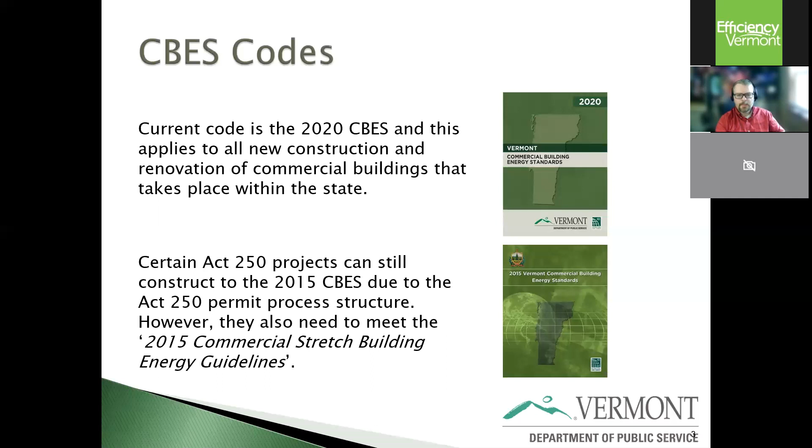So what does CBES apply to? Well, it's easier to say what it does not apply to. So basically, if it's a residential building and it's covered by the residential building energy standard, obviously it wouldn't apply. Low energy buildings—oh, I just realized I messed up the slide there. Never mind, I'll fix that for the slide deck you'll have access to. Low energy buildings, basically, if the building uses lower than 3.4 BTU an hour per square foot, which is really low.

That's kind of like passive house standard almost, which would be difficult to necessarily do currently with residential buildings. Unconditioned buildings, which basically means you're not heating or cooling the space—greenhouses, for example—seems kind of obvious.

Although the 2021 IECC, which these codes are based off, will start to regulate those. But since Vermont law specifically exempts agricultural buildings for the most part from having to meet the energy codes, that would not be included.

Inflatable buildings—I've seen a few of these, generally used for over winter—but I've never seen an inflatable office, though maybe it exists.

Yurts. It seems a bit of an odd exemption, but believe it or not, people are using these for commercial space, and as a tent, it's really hard to make it meet the commercial energy code, which is why we created an exemption. But it has specific requirements.

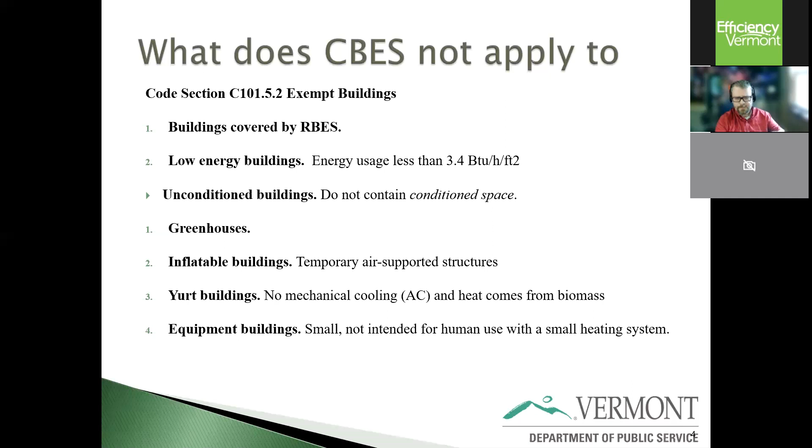Now, how does CBES and the state energy goals interact? It's kind of a yin and yang approach, I guess—they both inform each other. A great example of this is electrification.

Prior to the 2020 code, there were very strict guidelines on what you could do in terms of using electric resistance to heat a space. It was basically prohibited except under great conditions of hardship, or if it's just hard to heat any other way. The 2020 code as it currently stands includes specific exemptions around using electric resistance heat.

For example, multifamily buildings can be exempt if their heat load is less than 6 BTU per square foot per hour—or per year, something along those lines, forget the exact number. Or if you're using heat pumps that would need electric resistance backup heat, as long as your envelope is better than, I believe, 2.5 air changes an hour.

Well, the standard was 3 air changes an hour at 75 pascals, which probably doesn't mean much to you people, sorry.

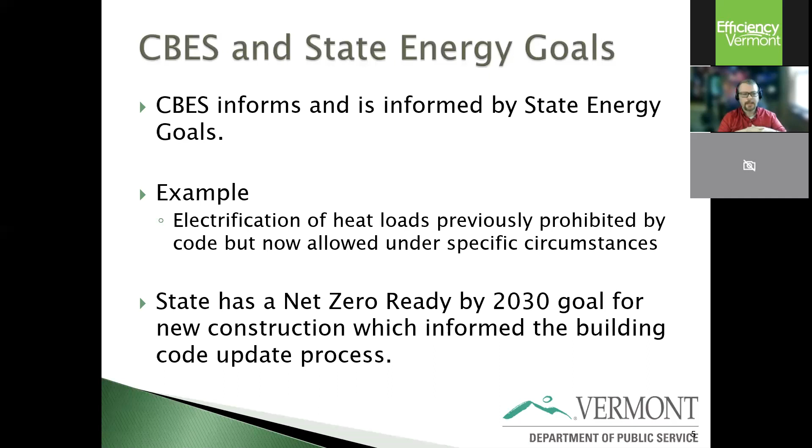So basically, the code gets updated every time the IECC, which the code is based upon, gets updated. The IECC is typically on a 3-year cycle, but this past year it's been delayed a little bit, so it's only just been published as of January 2021, which means we will be looking at starting the update process again at the end of this year.

But the earliest that update would come into effect would be January 1st, 2023 at this point. It may actually be later, and we'll get to why that is in the next slide.

So basically, the current code came into effect in 2020, on September 1st. And it took over a year of stakeholder meetings and then public hearings, etc., going through the rules process in order to get the code adopted. And then there's a minimum of 3 months after the code is adopted for it to become effective.

We actually delayed that from 3 months to 9 months to make sure that we had all the supporting materials and computer software, etc., prepared, so that when the code took effect—

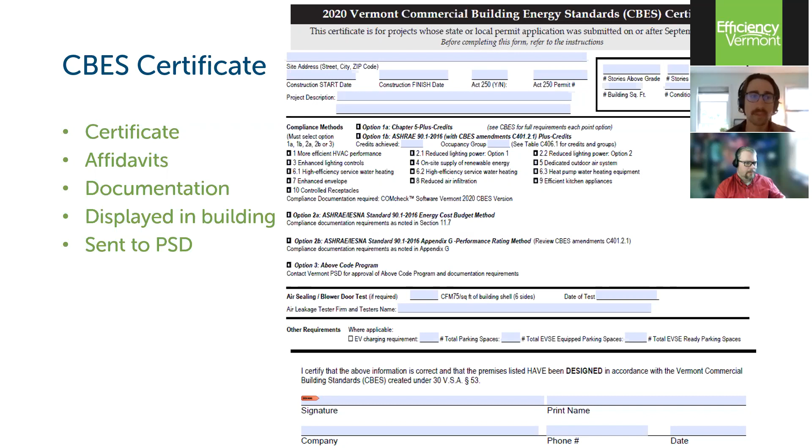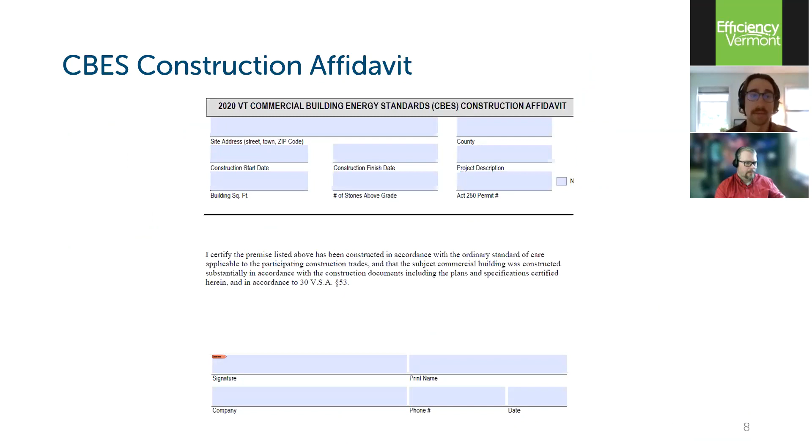And again, there's the two affidavits that need to be signed. There's the construction affidavit saying that it has been built to the code standards, and then right after that is the design affidavit saying that it has been designed by or designed to meet the commercial energy standard levels.

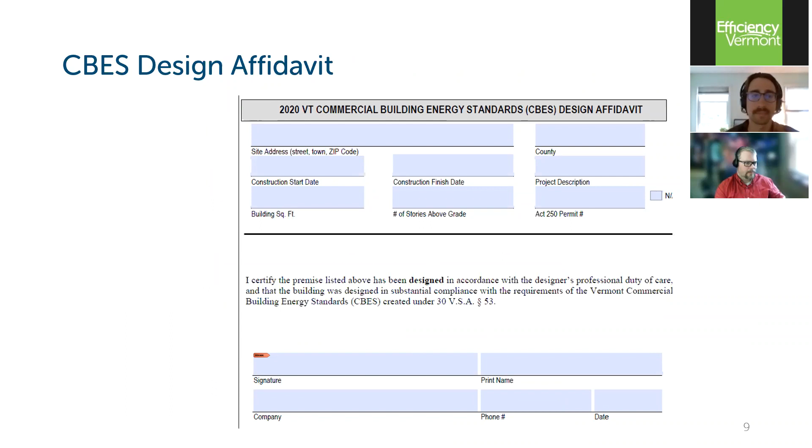Also on the Public Service Department link, whomever is filling out that certificate - it could be the owner or the designer - they also need to fill out some compliance documents that go with that certificate, using the COMcheck software that comes from the U.S. Department of Energy. There's a specific Vermont 2020 energy code selection in there that I'll show. Basically you input what your envelope, mechanical, and electrical levels are for the building and the equipment you use, and reports are generated stating whether you meet or exceed the energy code. That's a little more detailed compliance paperwork to send to Barry as well.

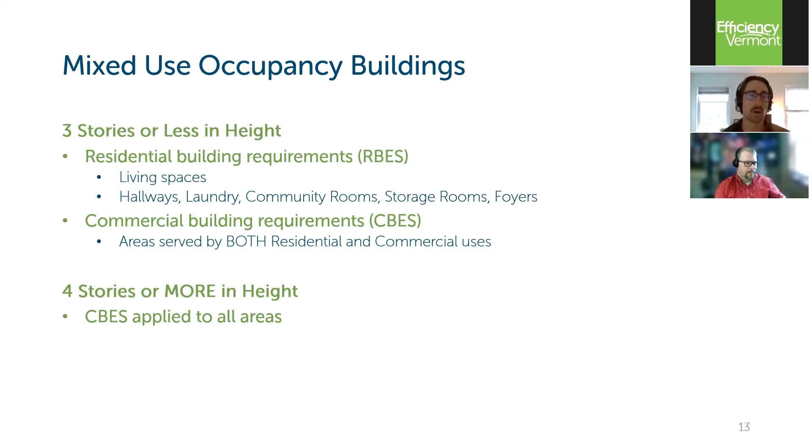So any residential-only spaces - living spaces, dwelling units, hallways, laundry rooms, and storage just for the residents - would need to follow the residential code. Areas that are commercial only, or serving both commercial and residential uses, would need to follow the commercial energy code. If you have a building that is 4 stories or more in height, then even if it has some residential uses, the commercial energy code will apply for all areas of that building.

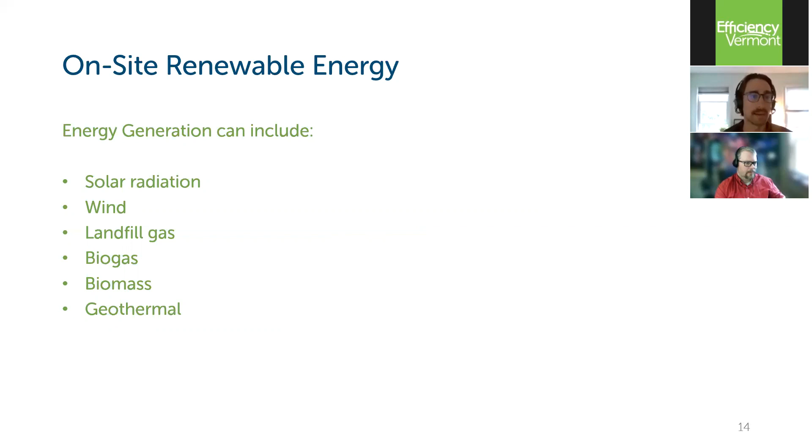There's a definition for what on-site renewable energy can include. We've got solar, wind, landfill gas, biogas, biomass - that's burning wood - and geothermal energy. There was tidal on here, but I took that off because I don't believe that makes much sense in Vermont.

And a new definition for this code is a semi-conditioned space. This is a space that is heated or cooled to a much lower threshold than a standard building would be for human comfort, and there are numbers here for what you would need to reach - it must be below these in order to be considered a semi-conditioned space. Really it's only, say, warehouses and some big storage rooms that might be heated to 50, 55 degrees and maybe have no cooling or just extremely limited cooling that would fall into this. So it's not very common.

But what it does is, if you have a semi-conditioned space, basically all the envelope requirements - the R values - are about half as much as what the standard insulation levels are.

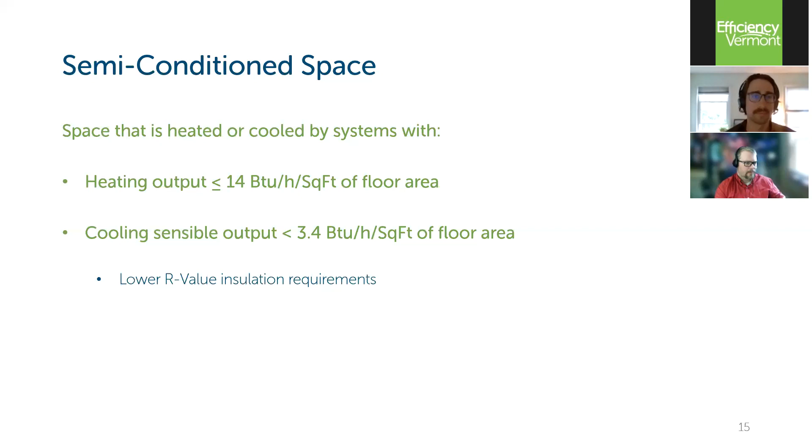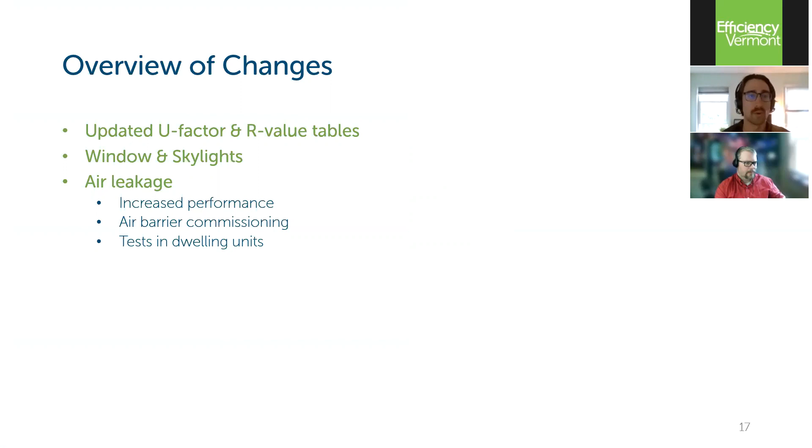Okay, so I'm going to move on to what those envelope requirements are for the new code. And these are the major changes. So some of the R values have been updated. Windows and skylights have been improved a bit, and there are now new air leakage requirements for all commercial buildings and also for dwelling units within commercial buildings.

So for the roof insulation, these are the new R values; if you do at least this, if not more, then you will meet the energy code. I believe the attic insulation is about the same as what it was in the previous code, but the insulation above deck, so if you've got a metal building or a building with all continuous insulation up on a flat roof, that has increased. And then metal buildings, you've got different layers of insulation going parallel to and perpendicular to the roof framing members. That's what all these different numbers here mean.

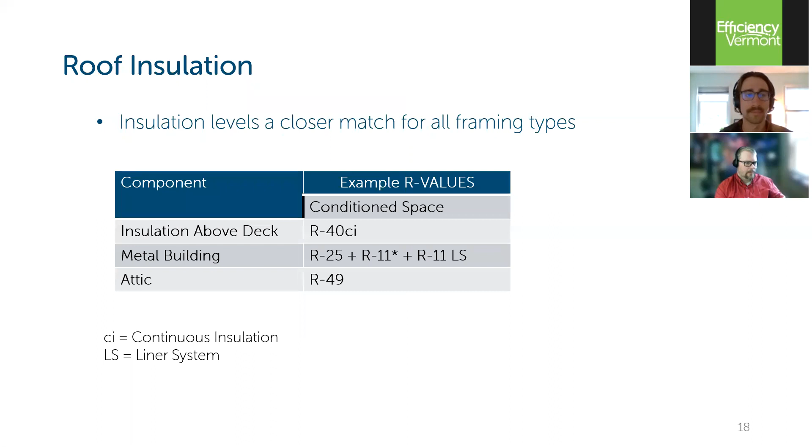But basically, they're all a much closer match, no matter what the building type is, whether it's attic insulation, metal building, or all above deck. It's a much closer match in this code. Any above grade walls, similarly, the insulation values are now a closer match. So depending on if you've got a concrete or a brick wall, metal building, a metal framed building, or a wood framed building, you've got some slightly different requirements for each of those.

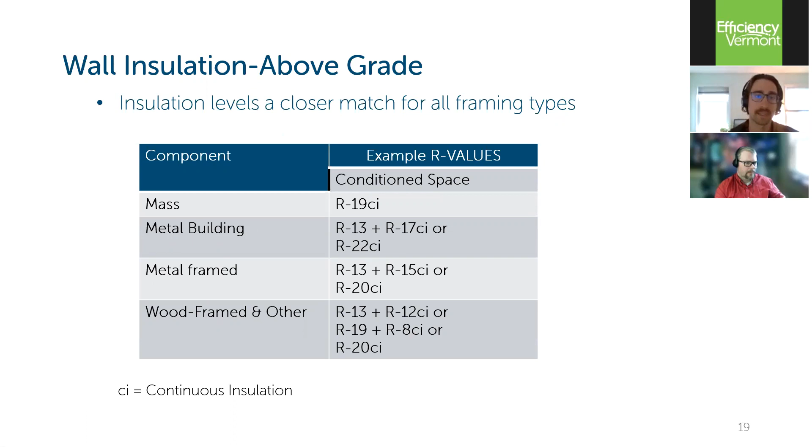And all of these now require CI, which is continuous insulation. So that's typically rigid foam or rock wool or some other insulation that is continuous, typically on the exterior, sometimes on the interior of the wall, that is uninterrupted by framing. So, as it says, it's continuous. So now all types of walls require some amount of continuous insulation in order to meet the code. Below grade walls, you need to meet R15 continuous insulation. That can be, again, either on the inside or outside of that wall.

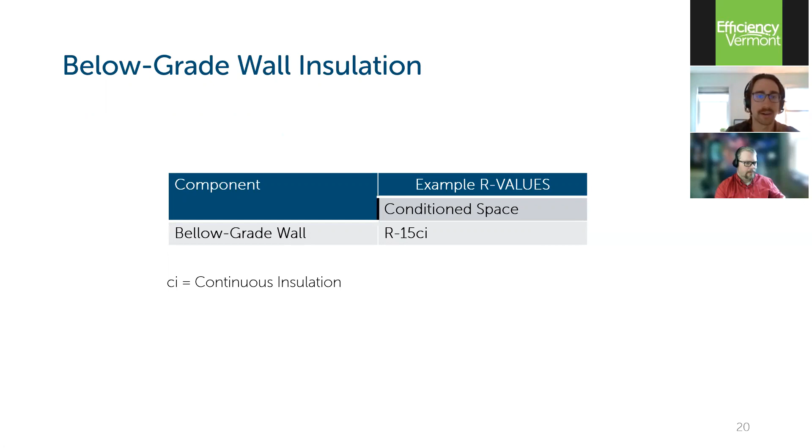And for floor or slab insulation, we've got a few different options here. What I want to call out as the biggest change are the last two. So for unheated slabs and heated slabs, you need insulation under the entire slab. So an unheated slab is R10 under the entire slab, and a heated slab is R20 under the whole slab. Previously, it was just either around the perimeter of the slab and or down about 4 feet. So that's been changed to be under the whole slab now.

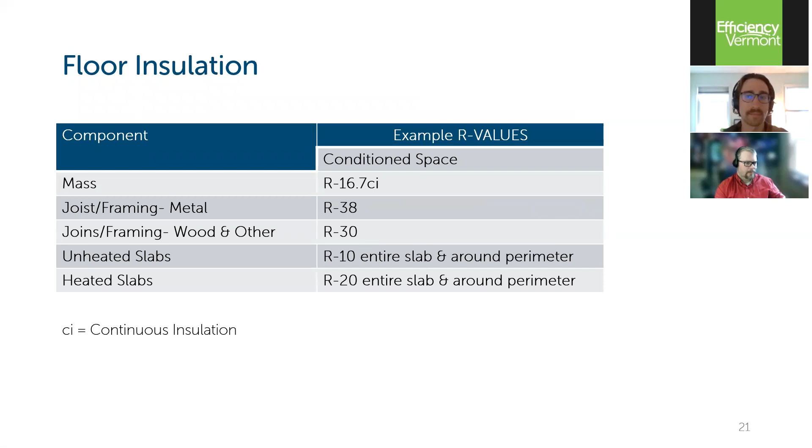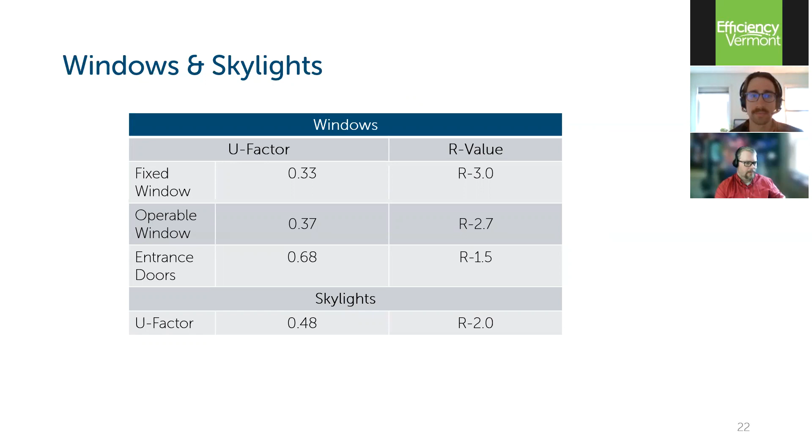So the other change that happened to the code that I think is pretty important is there are 2 different ways to comply for the air barrier of the building. You can either test the building with a blower door test and hit a specific number, and then you would pass that portion of the test. Or you could do air barrier commissioning, where you have someone come in and there would be at least 1 blower door test throughout it, a bunch of other items on a checklist, smoke testing certain portions of the building,

but you do not need to hit a specific number. The thought is if you do all these items, you are most likely to hit a good air barrier performance number. So I think most buildings are going to go with the first route, just the testing route, where you test it at the end, and if you hit the number, you're good. If not, then you need to go back and make some modifications.

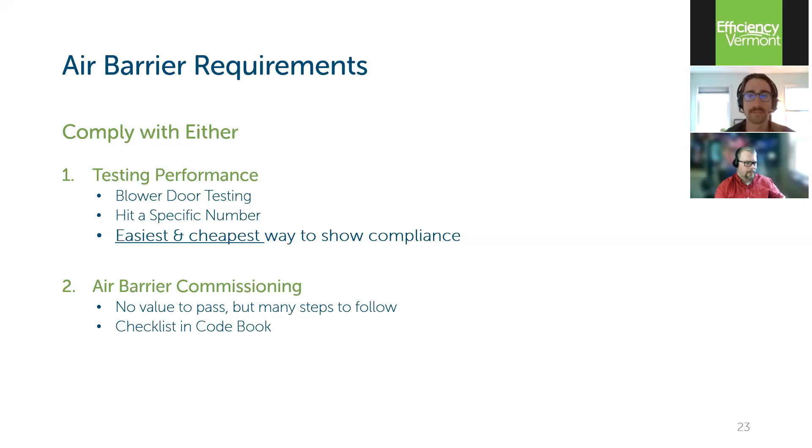So the new standards are 0.3 CFM per square foot, and that is measured. The 75 there means that it's tested at 75 pascals. You depressurize the building to that amount, and that's where you measure the air leakage. And the square footage number comes from a 6-sided envelope.

So in this version of the code, you'll add up everything, all the walls above and below grade, the slab or basement, and roof. The previous version of the code was we were only testing at 50 pascals and using a 5-sided surface area calculation. So it's not really comparing apples to apples, this version of the code to the last. We've got some numbers, if you want to compare those, we can help out with that.

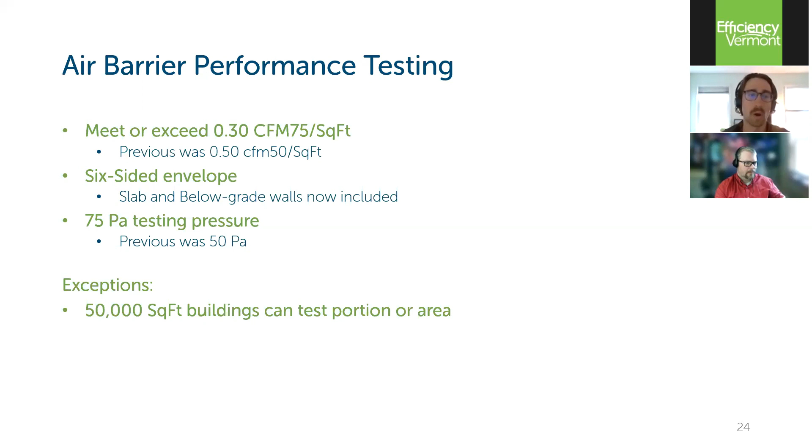But this is how the commercial industry around the world does it; it's more typical to do the 6-sided and 75 pascals. So I think that was a good change. And if you've got a large building over 50,000 square feet, there's some rules in there about just portions of the building you can test. You don't actually need to do all of the square footage of that building with the blower door test.

And the dwelling unit air infiltration. So if you've got a commercial building with multiple dwelling units in it, you actually need to put a blower door on some of these individual dwelling units and see how airtight they are compared to their neighboring dwelling units. So those must hit 0.35 CFM, again tested at 75 pascals, counting all 6 sides of that dwelling unit.

You've got to test about 10% of the dwelling units in each building. It's got to be random. The construction contractor won't choose them. And these must be retested if there's a failure until they pass. So this is a bit more strict, where you must hit that number and go in and do whatever's necessary to do that.

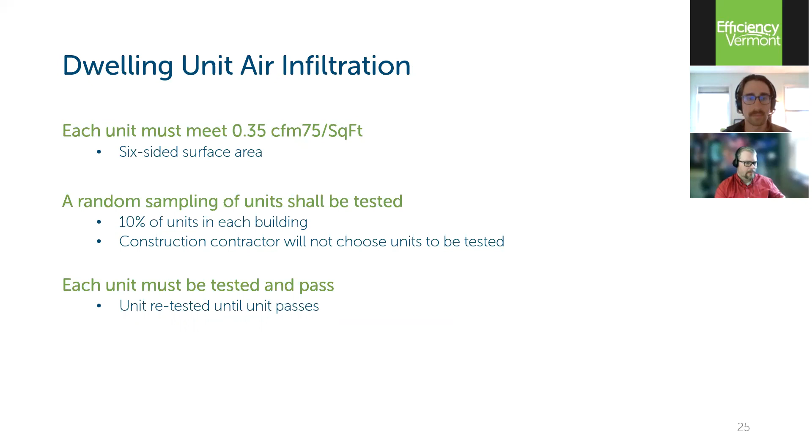All right, on to mechanical systems. Bryn, chime in if there's any questions, but I'm going to assume not and just keep rolling.

So the Commercial Energy Code references one other code, which is ASHRAE Standard 62.1, which is ventilation for basically indoor air quality. And what that states is that buildings cannot use just natural ventilation any longer. It can be a part of the ventilation strategy, but you basically need some sort of mechanical ventilation system to both exhaust and supply air to a commercial building. So that's, I think, pretty good to call out. Just baseboard heat and windows won't cut it anymore.

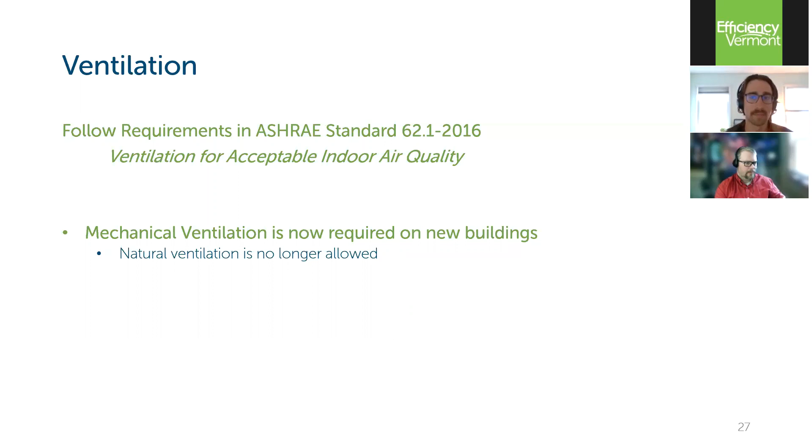Barry mentioned a bit about this, the electric resistance. So overall, electric resistance heating is still prohibited in this version of the Commercial Energy Code, as it has been for the past couple iterations. But there are two new exceptions that I want to discuss.

So one of them is if you have a multifamily building that has really low heat load requirements, and those are 6 BTU per hour per square foot at the design, at the coldest temperature that that building should see. So if a multifamily building meets that requirement, you could use electric resistance only to heat that building. It's just such a low load that it's not a huge demand to use the electric resistance. It can do a lot of work there.

And the other exception is for all other commercial buildings, you can use cold climate heat pumps with electric resistance backup. So the cold climate heat pump must be able to meet all of the heating load down to 5 degrees Fahrenheit outdoor air temperature, and then below 5 degrees, you can have the electric resistance heating turn on, and those need to be two different control systems to make sure that the electric resistance heat will not be on above 5 degree outdoor air temperature.

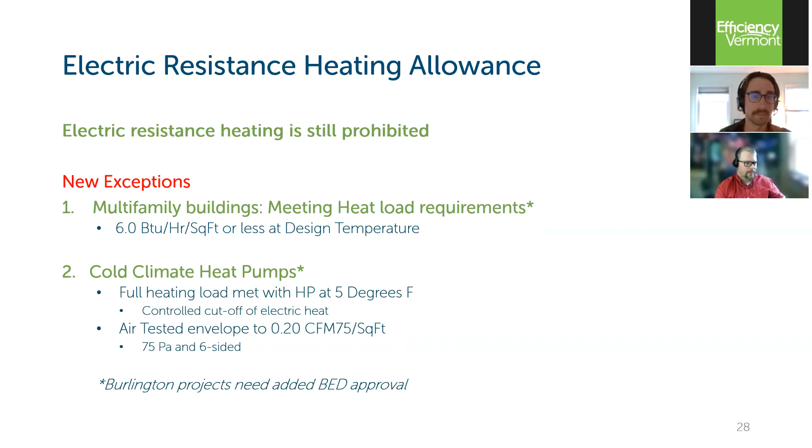There's a bunch more in the mechanical section, but I'm just going to share this one other slide. Basically, there's tables in there for what the minimum efficiencies are for multiple types of equipment: air conditioning units, heat pumps, chillers, VRF, heat pump systems, furnaces and boilers, and some others.

So basically in the code, there's the minimum efficiencies. Here's some boilers showing between 82 to 84% efficiency. The code says that is the lowest that you can install. And then there's options that are more efficient than that on both the heating and cooling equipment.

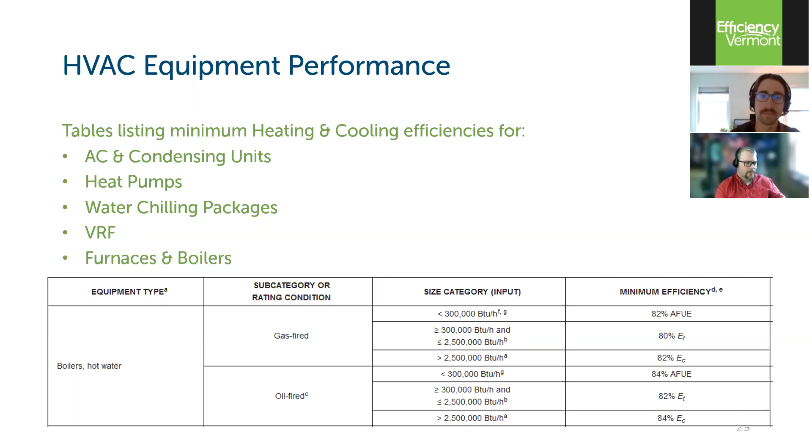So now I'll just mention, so this is service hot water, domestic hot water in a commercial building. Just got one slide on this. So the changes that happened here are the maximum size of individual electric water heaters increased from 5 kW up to 7.5 kW. And if you have a heat pump water heater that also has electric heating element within that, there's no limit to how large that electric resistance heating element can be.

If you meet these items: 60% of the hot water comes from just the heat pump and not the electric resistance, if you've got low flow shower heads, and any dishwashing equipment is Energy Star rated so that it uses less water. So those are two new additions that I think we're going to see utilized more often in this version of the code.

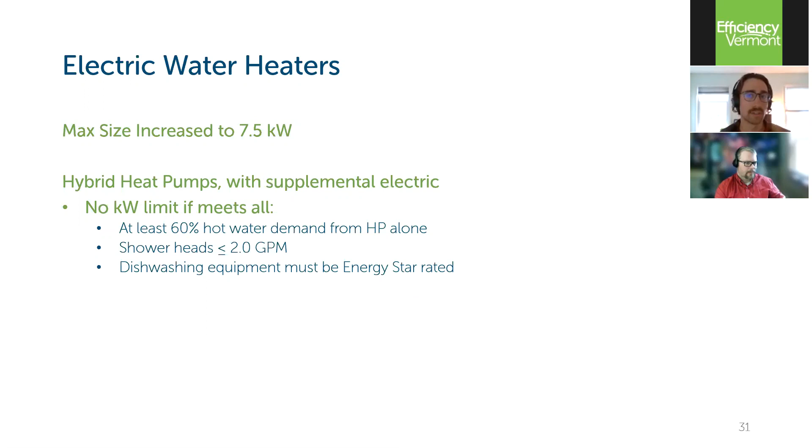Now I'm going to move on to lighting systems. There's a lot in here as well, so I'm just kind of touching on a couple points. For the lighting systems in buildings, it basically starts out on the controls side. It states that occupancy controls are required in a good number of spaces. So if this was an office building, almost a majority of the spaces, I'm not going to read them here, but they're listed, would require occupancy controls that would turn the lights off after at least 20 minutes.

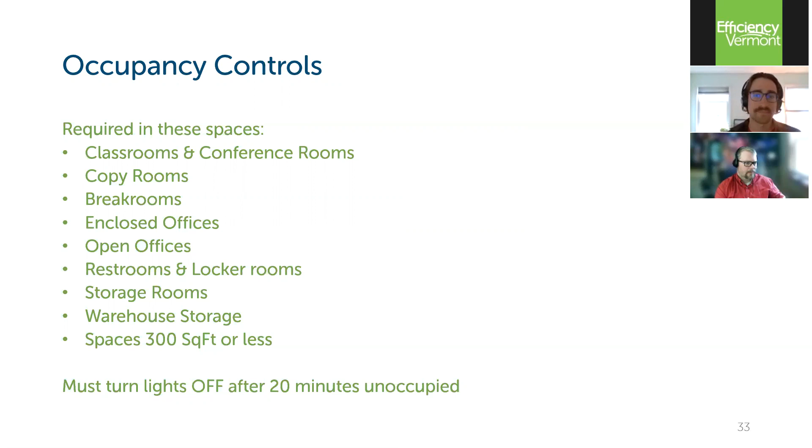And there are daylighting controls required in areas adjacent to windows and under skylights, if there's more than 150 watts of lighting fixtures that are within those daylighting zones. So that can be a good number of spaces as well. If you've got a restaurant or shopping area, the first floor of those don't need the lighting controls, and some other areas like healthcare facilities are exempt from that as well.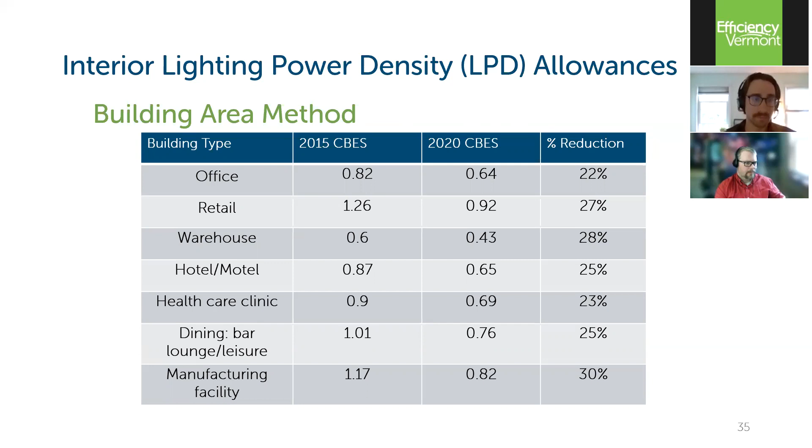And I just listed, there's more in the code, but I listed some of the most commonly seen building area types in Vermont. Basically what it comes down to is it was about a 25% reduction from the old code to the new code. That's still attainable. Efficiency Vermont is recommending even 20% better than the new 2020 levels. That's very possible with LED lights. So there is still room to exceed this. So this is looking at a full building based on the type.

There's another strategy. I won't go into too much detail, but you could look at every single space within a building and see if those all add up to meet the energy code values. So again, there's an even more extensive table that I took a snapshot of that has the watts per square foot for different spaces within a building: offices, warehouses, corridors, conference rooms, etc. Some of those went up, or some of those stayed the same. Some got more stringent. Again, overall, if you kind of average them together, the reduction was about 25% more stringent lighting for 2020.

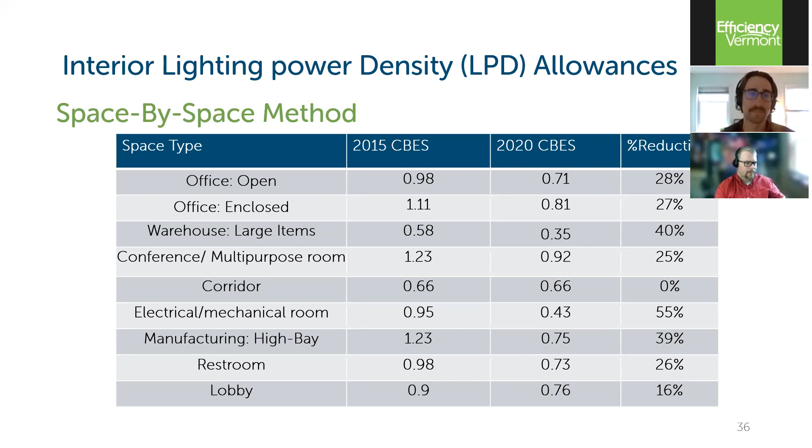So that's interior lighting. Moving on to exterior lighting. This one's done a little bit differently. What you start with is there's 3 different types of lighting zones that buildings can be located in within Vermont. I'll start with zone 3. Zone 3 are basically like Vermont's downtowns and city centers, where there's a lot of lighting already in place. Zone 2, I think, is the most common, where you've got both residential and some commercial areas happening next to each other. And Zone 1 is pretty rural, undeveloped areas within national parks. I think some ski areas, if they're not that developed, could be included in that.

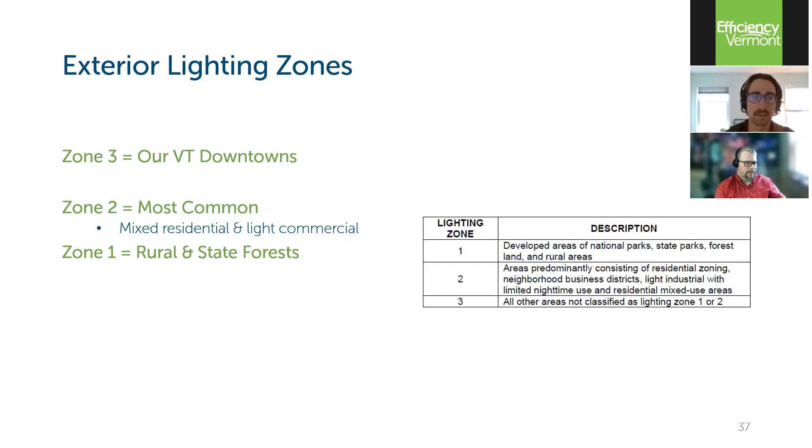So the reason we have those zones is similarly, there's an exterior lighting power density allowance based on what different things you have outside of your building that you're illuminating. And you've got the 3 different zones here. Basically, you've got parking lots. That's one that's pretty common for all buildings. You've got a very small watts per square foot allowance for those.

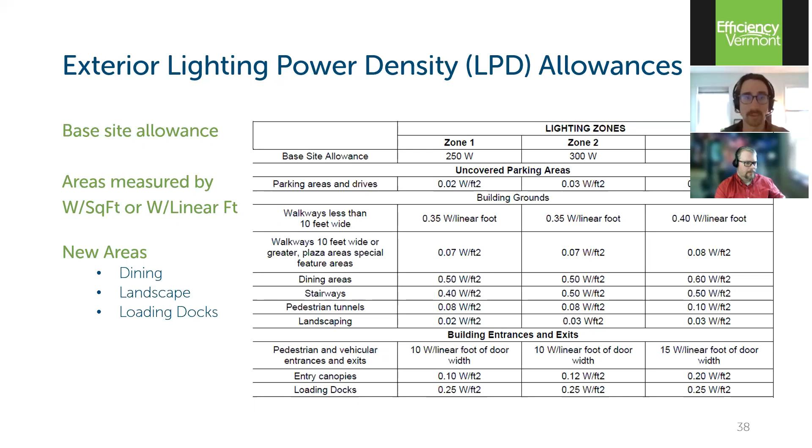Walkways, dining areas, stairways, landscaping, loading docks, etc. There's more to this table. So things are measured either by watts per square foot or watts per linear foot for walkways. And these have been reduced about 50% from the previous code, but using LEDs, Efficiency Vermont is recommending between a 20 to 30% improvement over these levels, which is still attainable.

And the last part I'll talk about for electrical is electric vehicle charging stations. This was a new addition to the code.

Basically, what the code says is, I'm going to show a table on the next slide where you calculate the number that you need based on the parking spaces you have in your commercial building. The code states that whatever that number is, you need to install 50% of the electric vehicle charging stations and then pre-wire the remaining 50%, so that down the road you could install the charging equipment, but you don't have to install all of them when the building is first built.

Those parking spots with the chargers need to be labeled for EV use only, to distinguish them from the other spots so that gasoline cars don't park in them.

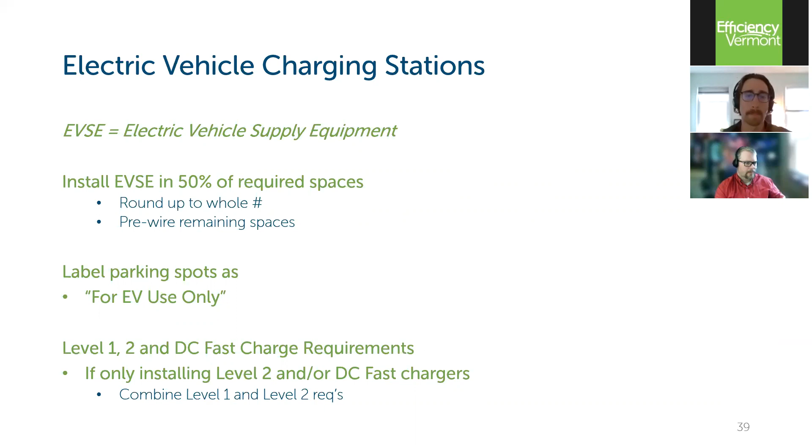You've got level one and two, and fast charge requirements that are split up in the numbers, and you would combine the level one and level twos together if you were only going to do level two or fast chargers on site. So this is the table from the code.

Basically, depending on the type of building that you have, which is on the left here, and the size of the parking lot, it determines how many charging stations you need.

Groups A and M - M is merchandise, that's like a sales type of building. B is businesses, education, so schools. I is institutional type buildings, and then R1 and 2. R1 is hotels and motels, and R2 is apartments and dorms.

So just going through an example here, I think is helpful. Say you've got a hotel being built, that's group R1, and it's got 100 parking spaces. When you look at the table, for over 25 parking spaces, there's an option A and an option B.

If we look at option A, it says that you need 0% of the spaces to be level 1. So that's easy. And 2% of the spaces should be level 2 or DC fast charge. So 2% of 100 is 2 parking spots. Again, the code says that you need to install 50% of those and pre-wire the other 50%. So with option A, you need to install one charging station and pre-wire one other.

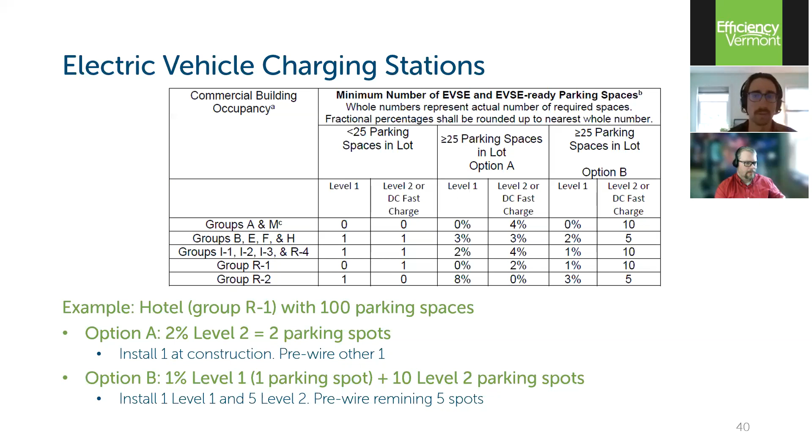All right, so moving on here. After the whole code, you follow everything in there, there's this section C406 that's called additional efficiency packages, and there are 10 different options. You need to get 6 credits from these 10 different options for a new building, and they all sort of vary based on the type of building that you have.

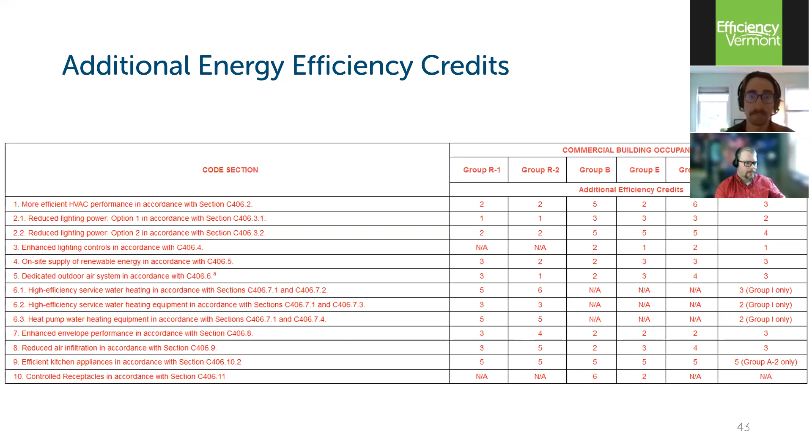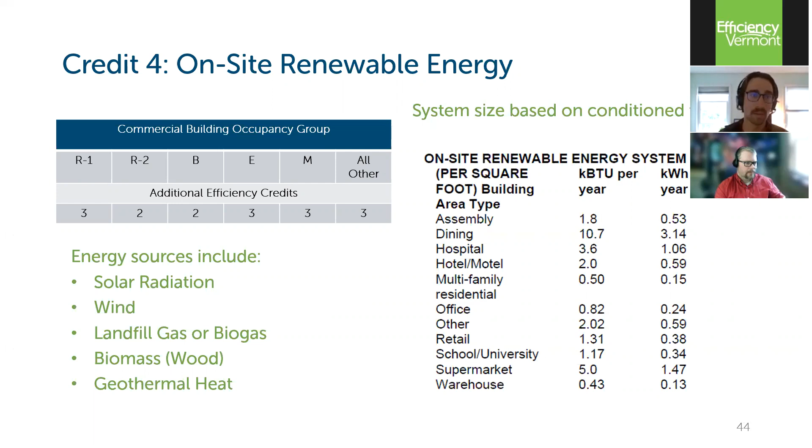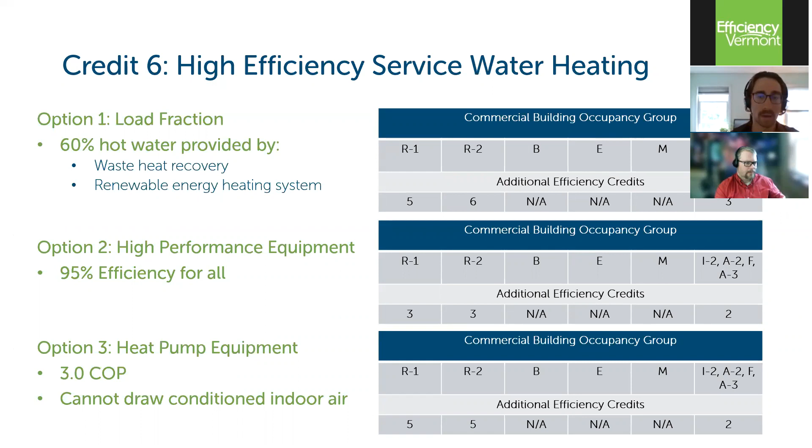Sarah asks, is a residential home that's converted to a town library considered commercial or residential under the energy code? If it's converted from a residential space, I'll go into more detail on that -- it's a residential space converted to a public space. So the change of occupancy is going from residential to commercial, so it would be a commercial space. It's an existing building, so I've got a couple slides on this coming up actually.

For existing buildings, certain aspects of the code you would need to meet, like the lighting requirements, you would need to make sure those meet the energy code. If the energy usage doesn't increase that much, you would not necessarily need to go in and re-insulate the whole building from residential levels to the new commercial levels. If it's a really old, uninsulated residential building, and you're changing the purpose of that building, then theoretically you would need to bring it up to the new energy code levels if it's going to use more energy than the residents did.

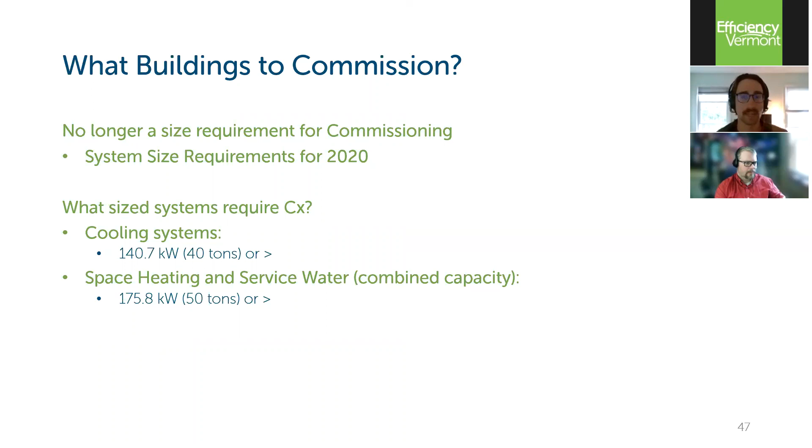Okay, so now moving on. So after all that, that's chapter 4 of the code. After that is chapter 5, which is for existing buildings.

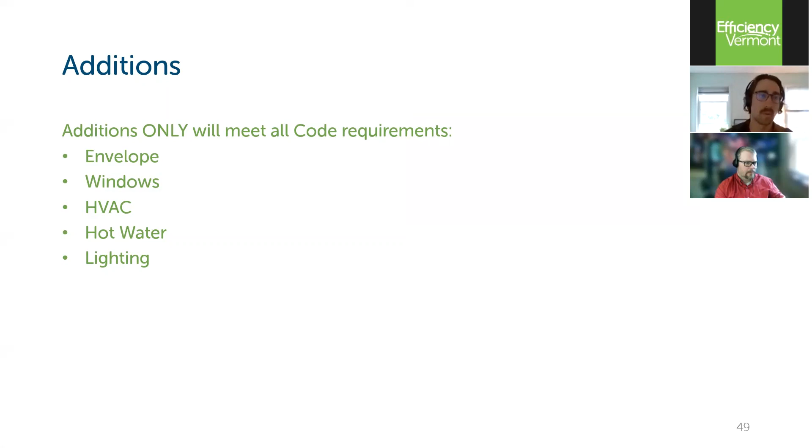If you have any addition that you're putting on an existing building, the addition needs to meet the energy code, including envelope requirements, windows, any new HVAC equipment you're putting in, hot water, and lighting systems.

Any alterations to an existing building - basically the code states that an existing building cannot be less conforming to the code than it was before the alteration. So basically what that means is items that need to meet the code are any new envelope assembly.

An alteration might include some new portions of a building, or new walls that go up, so those would need to meet the energy code. Any new boiler or other heating or cooling system replacement should meet the energy code. Same with your hot water systems and your lighting systems - if you're pulling out the lighting, then the new lighting should meet the energy code requirements.

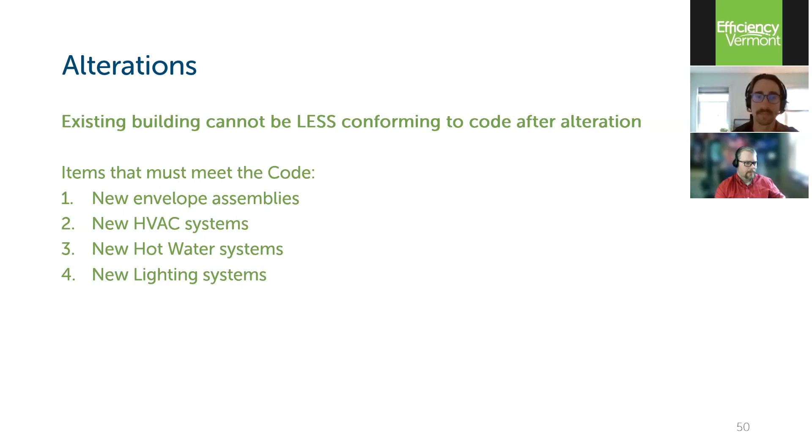It specifically states that these are alterations that you do not need to bring up to the energy code: installing storm windows, putting a window film on single pane glass, or exposing a wall cavity or floor/ceiling cavity that is already filled with insulation - that does not need to be brought up to the energy code levels.

It's not saying that you need to take a wall cavity and tear that off and bring that up to code if you weren't planning on removing or exposing that cavity in the first place during that alteration. So if it's there and it's not being touched, then you can leave it as is.

If you're replacing existing electric resistance, you can do like with like and still put those in - that's kind of one of the few areas you can use that.

A roof recover, which is just leaving the existing roof covering and installing something directly over top of that, does not require you to increase your insulation levels. And similarly, the air barrier does not need to be updated if you're doing a roof recover or replacement.

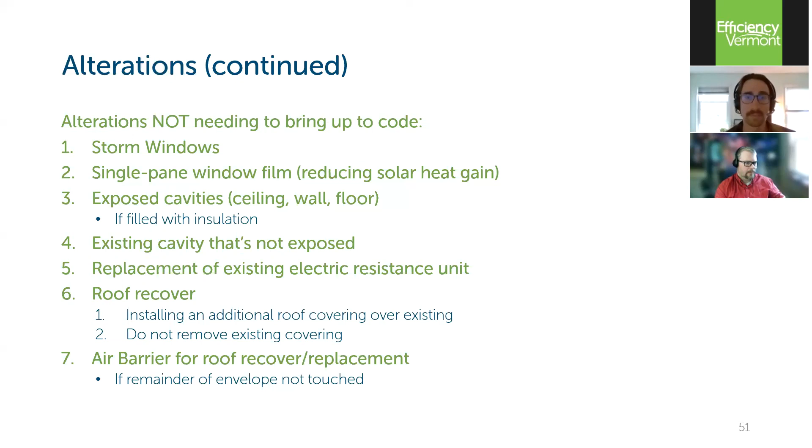Any repairs to buildings - the code states that these items do not need to be brought up to the code levels. So if you're keeping your window frames, but just replacing the glass, that doesn't need to meet it. A roof repair, or air barrier on the roof, if that's being repaired.

A vestibule on an existing door - you don't have to bring that up to the new vestibule requirements, but if there was a vestibule, you can't remove one and not replace it with another.

And if you are replacing bulbs and ballasts for, say, fluorescent lighting, you wouldn't need to bring that up to code levels if you're just changing those out, if you've still got some in your buildings.

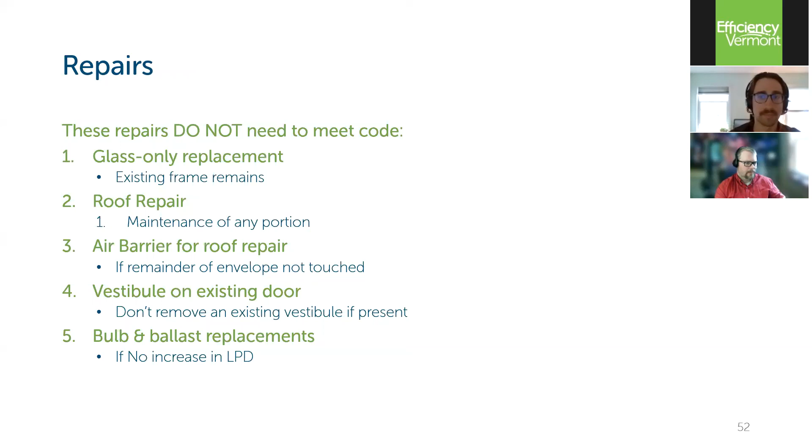So just a couple more here. After that, it also states - change of occupancy or use. So if a building changes the type of occupancy, say going from a warehouse to office space, the warehouse is pretty low energy use because it's not heated or cooled that much or at all.

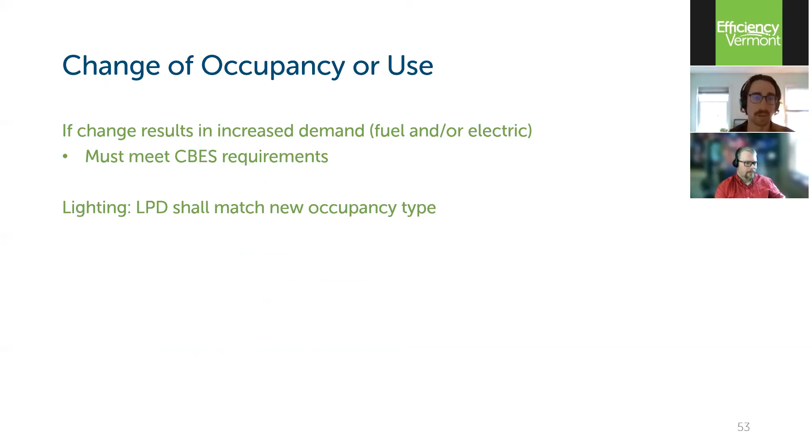If the change of use is going to result in an increased demand of fuel or electricity, then it says you should meet the energy code requirements - all of them: envelope, lighting, all of that.

And as Barry mentioned, you can submit an exemption to the historic building preservation office of the state, where if you can demonstrate that complying with the energy code would threaten, degrade, or destroy the historic form of the building, and if they agree with you, then they can give you an exemption to not meet the energy code for at least certain portions - whichever items you think would harm the historic nature of that building.

I've got a couple useful links here for where you would send that. Again, that's listed on what Barry shared on the Public Services website, and that form is on there.

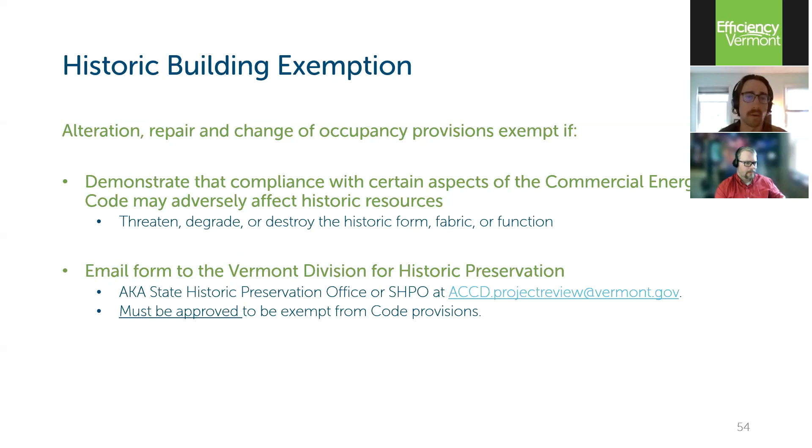I think if you want copies of the code books as well, calling or emailing the Code Center, we've got some we can send out so you could have hard copies if you'd like, as opposed to online.

That is what I have so far. Bryn, was there anything else, or did Barry want to chime in, just to cover Sarah's questions about existing buildings being converted from residential to commercial use, and whether or not weatherization of existing buildings would trigger code?

Well, as Charlie said, moving from a residential classification to a town library would change it to a commercial building. So you'd have to look at meeting the provisions within the commercial code. Obviously, there are a few potential exemptions. Moving from a home to a library may result in not using as much energy.